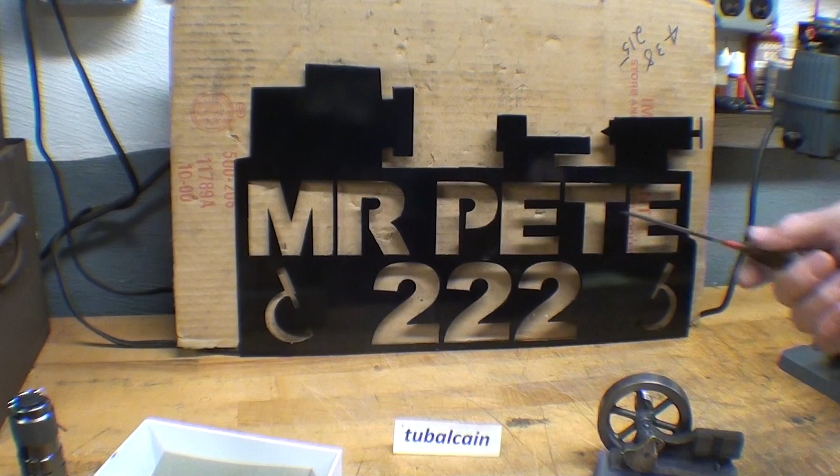Here's what Aidan made for me, this nice cutout saying Mr. Pete 222 with a couple micrometers on it. Look at the lathe up here, there's the chuck and the compound and the tailstock. Thank you, Aidan, that's pretty cool. You'll see that here in my shop from time to time.

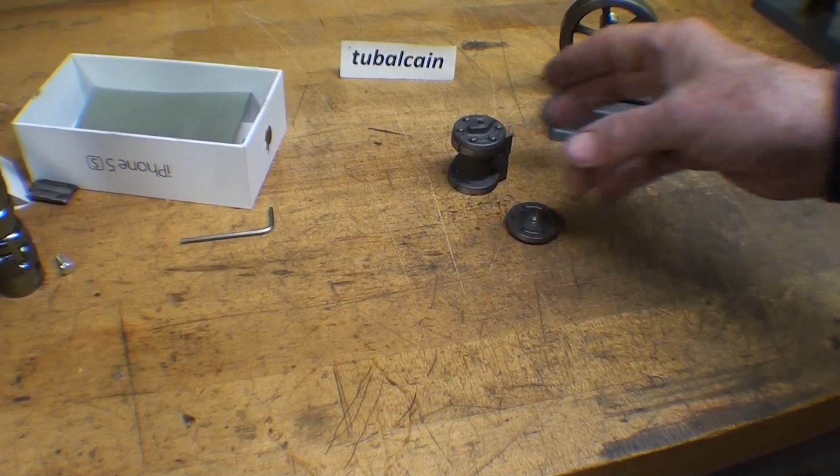Now, in the last episode, I was drilling and then tapping these 6 holes here. So take your time when you do that so you don't break off a tap. I sighed a little bit of relief when I finished that and did not break off a tap.

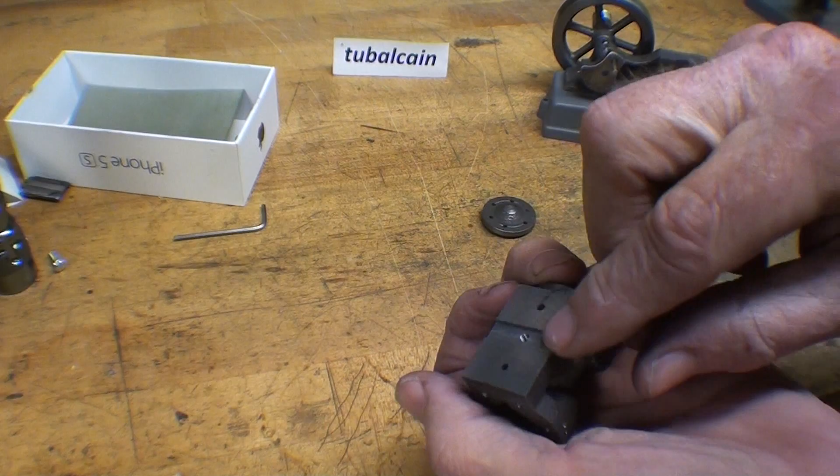So this being pretty much done, the next thing I want to do is start making some of the bar stock parts, particularly the little pivot shaft, which is pretty simple, but I'll make that in a minute. First I want to take the two heads and provide the clearance I talked about earlier so that this little step does not block the steam port.

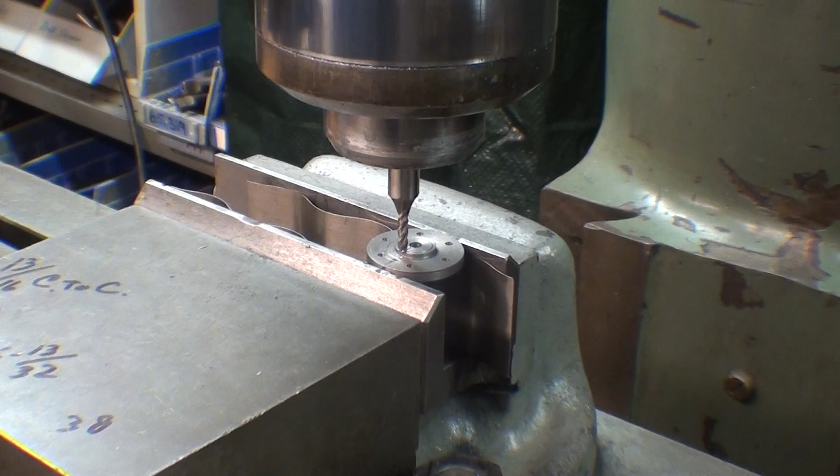I'm at the mill and I'm making the little clearance slot on the backside of the head for the steam to get in there, in other words, for the steam port. That's an 1/8 inch end mill.

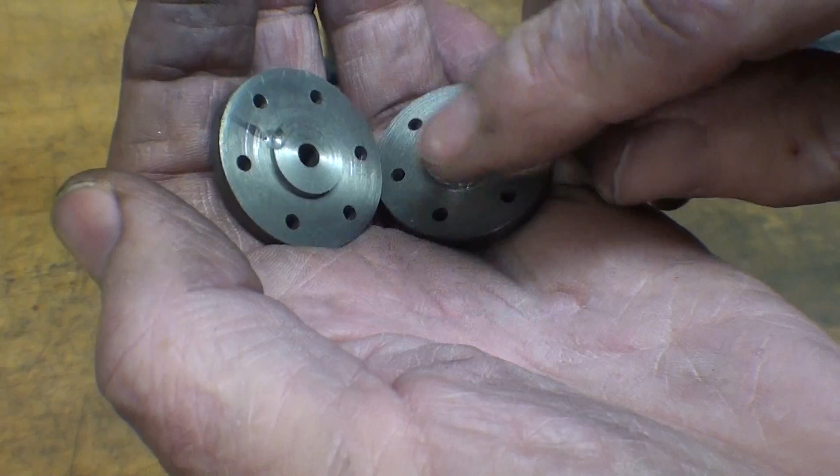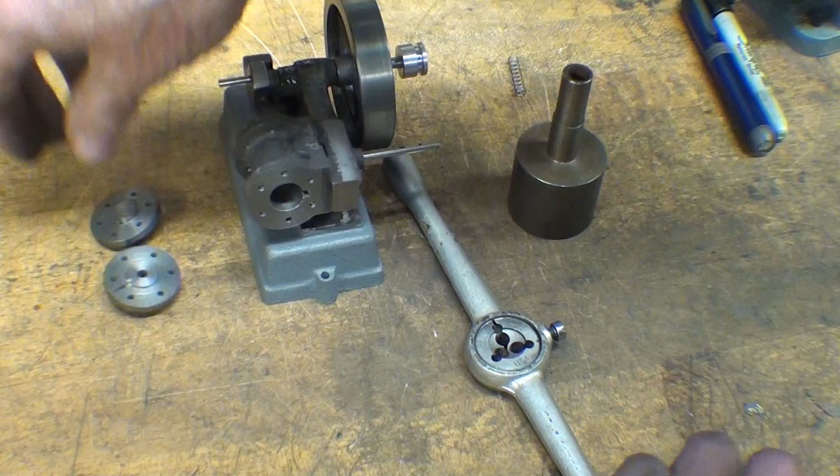That's all there is to that, maybe a little bit deeper yet. Here's the little clearance slots that I made on the heads. Originally I was going to put them in at an angle, but I don't think there's any need, and this was easier.

I've been working on this project for 9 or 10 days, and I'd say I have about 25 hours in it or more. I didn't work every day, and I didn't work 8-hour days. However, it probably takes about twice as long to do this while I'm videotaping than if I was just working alone, so to speak.

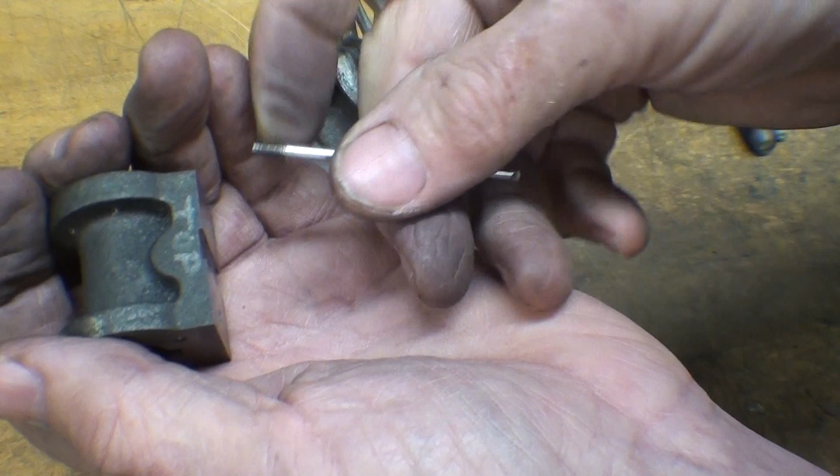I'm not working alone, there's thousands watching. Well, the next thing I'm going to do is make this pivot pin, and I've already taken the liberty of taking this 1/8 inch rod that was included and putting it on the lathe and putting about 5/16 of 5-40 thread. Now 5-40 thread again is 1/8 inch. Eventually I'll Loctite that in because you don't want that to spin loose as the engine is running.

But it goes into the hole here, and this is the point at which you'll determine whether or not you drilled this hole square and tapped the hole in the cylinder good and square. Will it be a good fit? So looking at the spring that came with the kit, I'll put that on there, and there's a nut, I believe there's a nut.

So I'll cut it off at the outer black line, throw that little piece away, and then I'm going to thread it 5-40 up to the other black line.

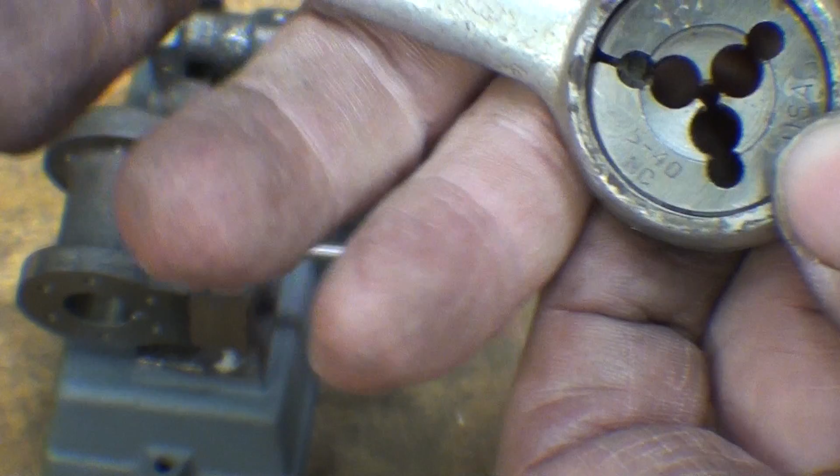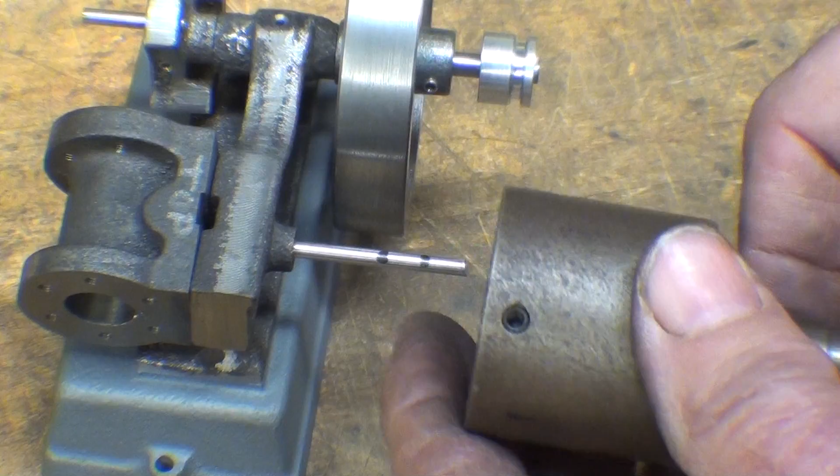Now, do not even think about using this type of die holder for making those threads, and this is a 4-40. But I have another one right here in this die holder, and I like to cut these threads on the lathe, it assures you a straight thread. If you use this other one, you'll be pouting all the way to the bank.

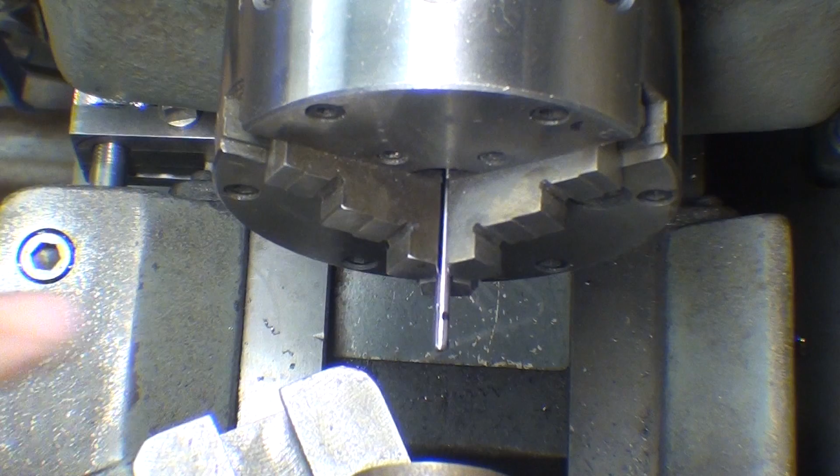You've seen me do this countless times. Be sure and use oil and chamfer the end of your work. I'm in back gear, slow speed, and I'm going to watch that line. You have to really shove to get that die started, so I'm shoving on the tailstock.

That's all there is to that. Now, since this lathe does not have a reverse, I take it out of back gear and just spin it off. Now it's better to have a little extra thread here because I'm not really sure how tight I need to make that spring in order for it to run. Back to the bench.

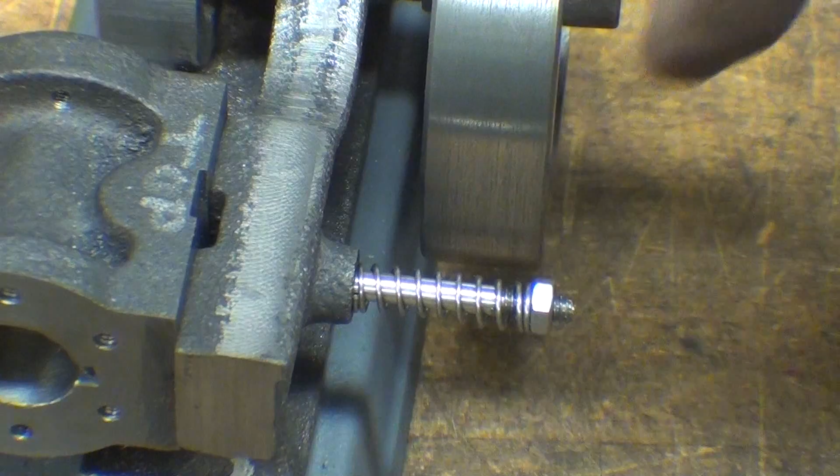Now temporarily assembled, and this rod may be way too long and I probably should have put a little more thread on it, but I just don't know how much I'll have to take this up. There'll need to be a washer in there, and in fact they supplied 2 nuts, and I think I want to use one as a lock nut, in other words double nut it.

But let me show you something here, these are 4-40 nuts, but I'm wondering if they're 1/8 inch Whitworth. I'm not sure what 1/8 inch Whitworth is, but they are not BA. But they're pretty little nuts, and you say, well, what's pretty about them?

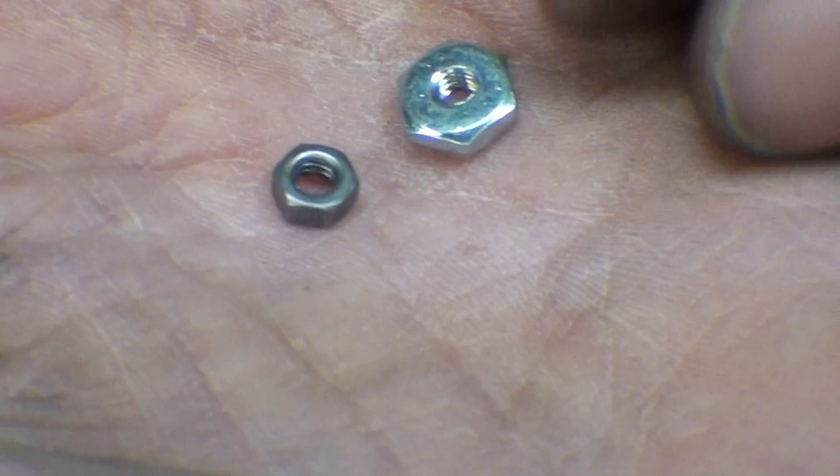Compared to a modern day plated 4-40 nut that to me looks so out of place and out of proportion, if that's what you would use. You see what I mean here, if I can get that on. There, you see what I mean? That isn't pretty. In some ways, that is pretty. You can make your own with small hex stock also.

Now I will move on, and I'm going to start the piston rod, and then I'll have to make the piston also.

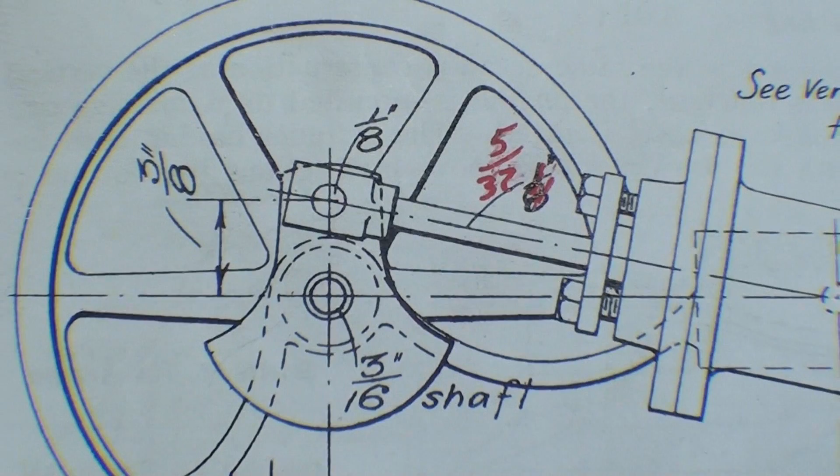Next I'm going to make the connecting rod end, and it's going to be made of 1/4 inch square brass, which was supplied. Now I changed the dimension of the piston rod from 1/8 to 5/32, but we'll have an 1/8 inch hole in there and an 8-32 thread on the end of it, and turn down just a little bit.

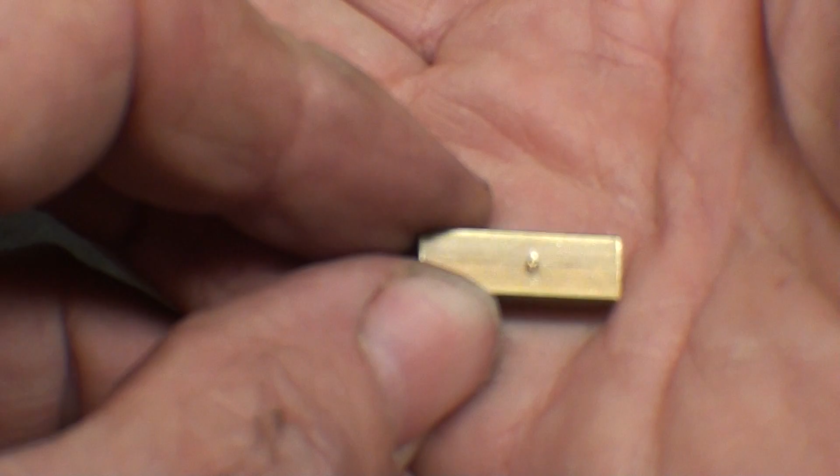And I intend to do that, and here's the piece already laid out with the cross hole, which will be drilled and reamed 1/8 inch. But I tell you what, I'm just going to drill it 1/8 inch because I want a little clearance. Sometimes the reamed size is a little bit too tight, although I don't want it to be sloppy.

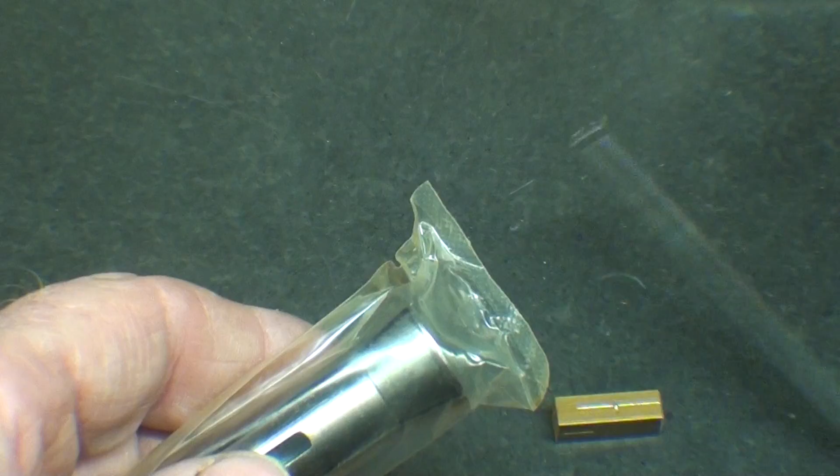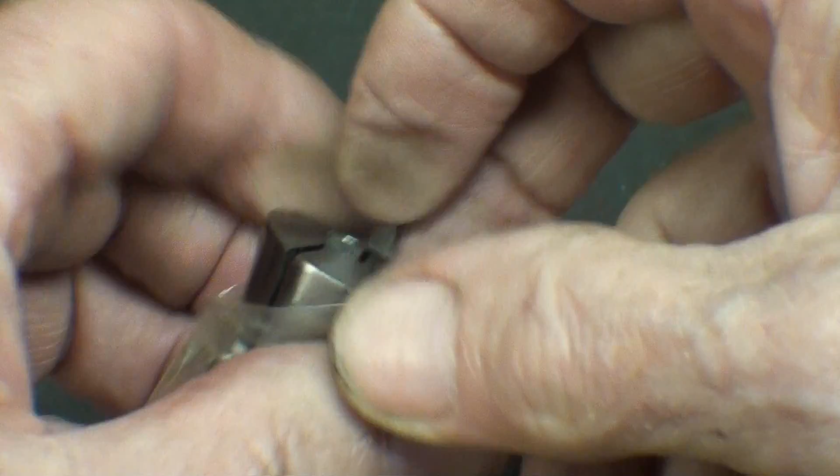And then I'm going to do this in a square collet. You know what, here's one I've had for a couple years. Never used it, never opened it, but let's break it out. This will be used on the Atlas lathe. This is a 3C collet, square collets. They make the job so much easier than a 4-jaw chuck.

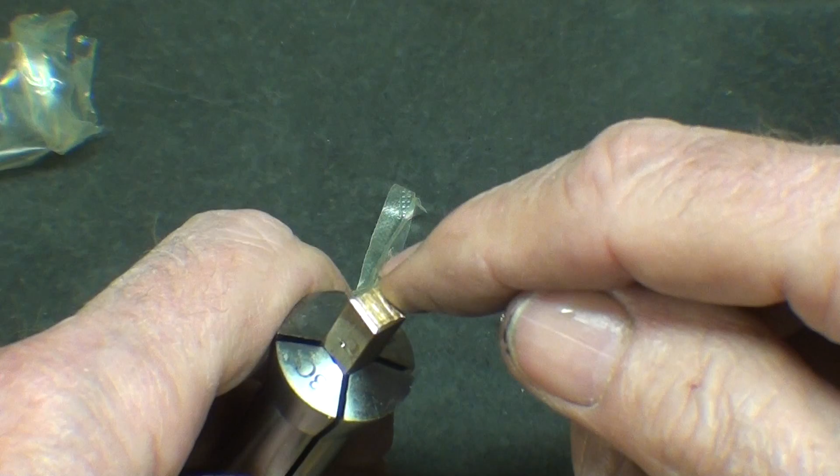So it'll go in there like that, but I think I'll drill, I've got some burrs on there. And it's so easy to drill that end hole and then tap it. I'll drill the cross hole right now off camera.

I've already drilled the cross hole, as just mentioned, and now I'm ready to center drill and then drill and tap the end. But you know, I wasted 20 minutes cleaning up the horrible thread that was on the end of that collet that I showed you a few minutes ago. So any time that I might have saved by not using a 4-jaw chuck was wasted. So anyway, maybe it'll work the next time I use it.

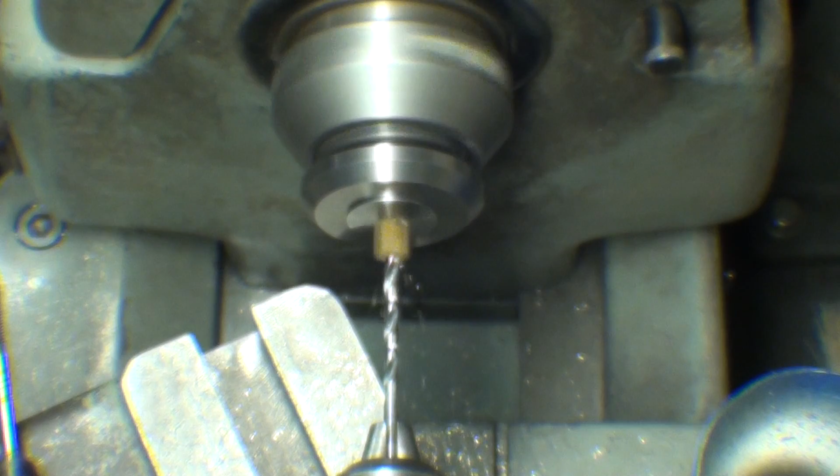And tapping it 8-32, including a bottoming tap. And now I'm turning down just a short section of it to remove the square corners.

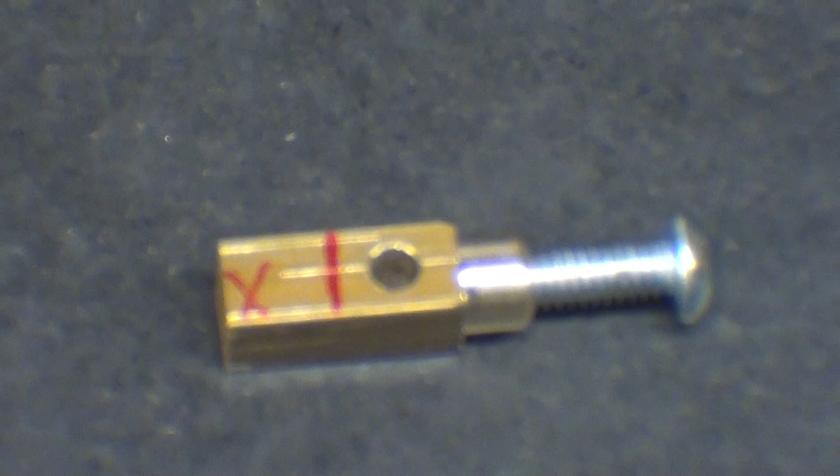Well, there it is. I still need to saw it off on the red line and then face it, and you can see that the part with the X on it really is waste stock, but there were no real dimensions for this on the drawing, and that's true with a lot of these little parts. It just leaves a lot up to your imagination and creativity, so I don't really consider it a set of working drawings, but there's basically the end.

Now it looks complicated, but there's just a lot of little operations on there, but the whole thing, if you don't have to repair a thread on your collet, only takes about 7 minutes.

Next I will tackle the piston rod made of 5/32 brass, and I'll just thread the end 8-32. I don't know what the length is, so I need to make the piston one step at a time here. But looking at it now as I start to assemble it, remember I talked earlier about not knowing where to cut this off or how long it should be.

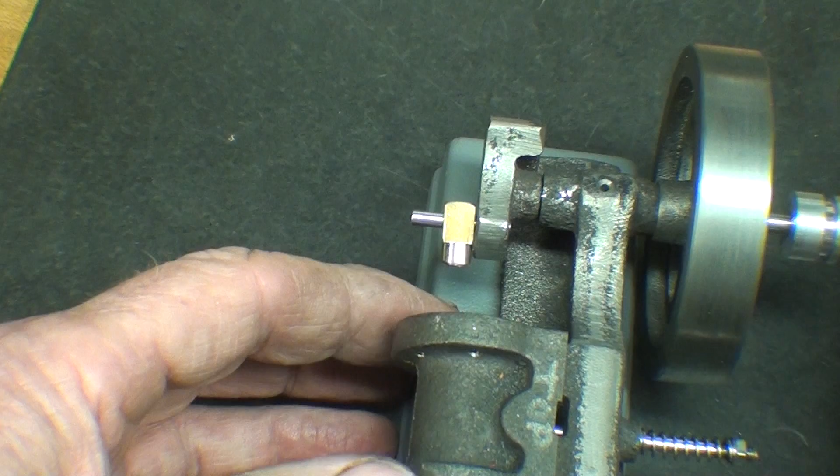Now it's becoming evident that I lay something in here. Well, what should I lay in there? This, perhaps, just an Allen wrench. You can see that I am off by approximately 1/4 of an inch, so I will have to remove material from those two spots to move everything over.

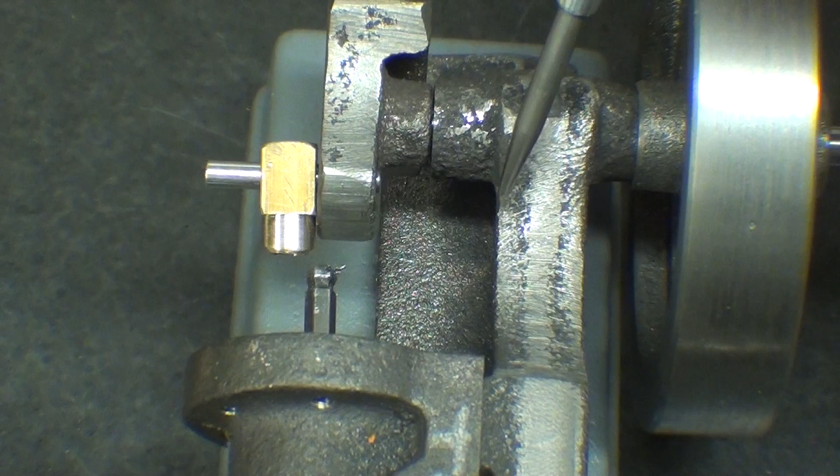And that's going to be bit by bit, but I think I'll wait until I get the piston made to do that.

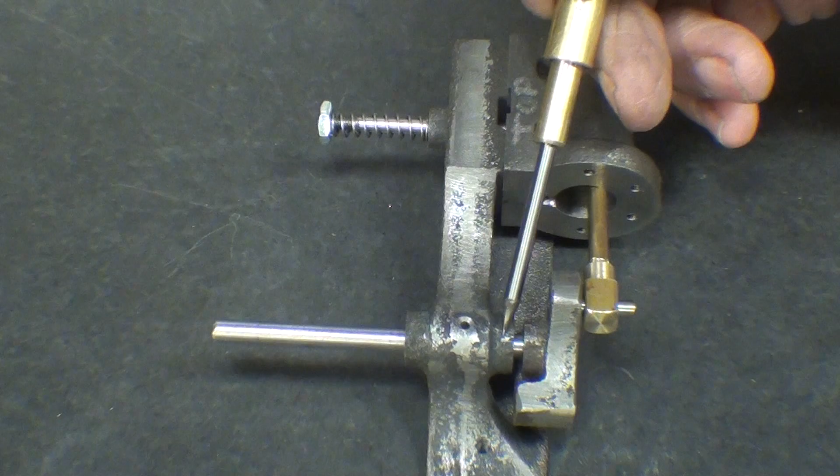In the last few minutes I trimmed some off of this main casting, so you'll see that's a little bit shorter. Also this is a little bit shorter, and then I needed even more material removed, so I faced a little bit off the face of the crank. Now I am able to get the center of the piston rod in the center of the cylinder, and still have just a little bit of space in here. So there's an awful lot of fitting involved when you're not working to exact dimensions on the parts, and that's all right when you just have a one-off.

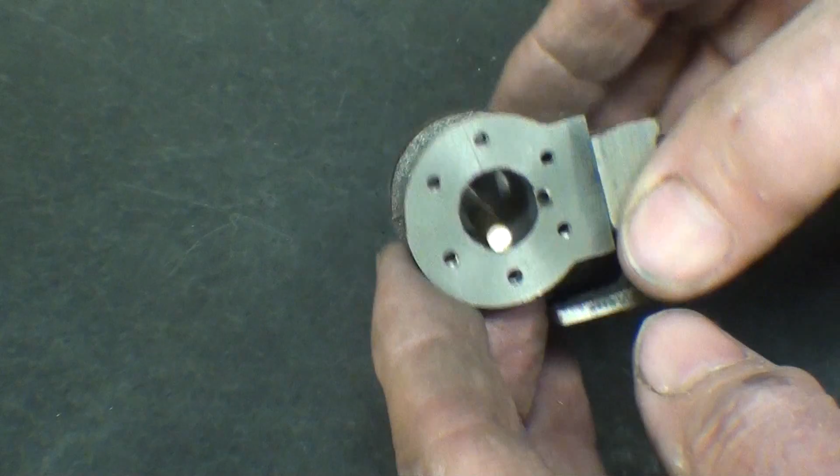Now the next thing I'm going to do is tackle the piston, which hasn't been made yet, as you can see, and I'm considering different materials. I was considering brass, and I was considering Delrin. Cast iron would be ideal too, but I don't think I want it to be steel.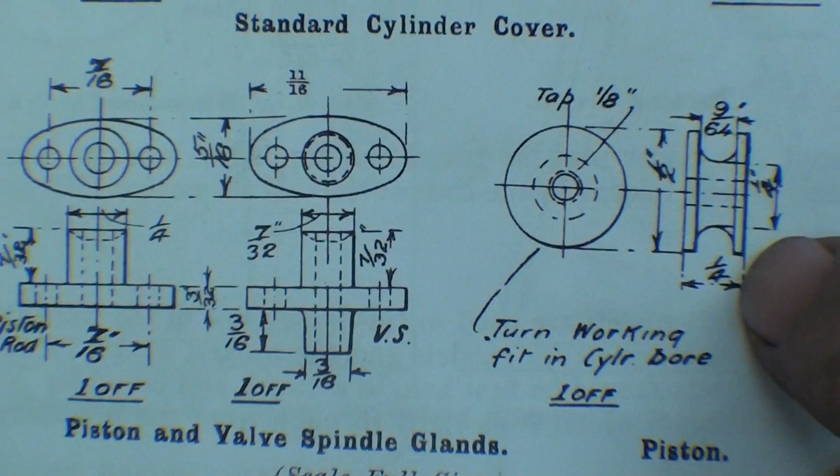If I look at the drawing, there's very little information given, other than that's the piston right there. And the groove there, I believe, is for a packing - that is, graphite packing. I'm not going to do that, I don't think it's necessary. So all I need is a piece of brass that's 1/4 inch long, so it's a really small piston.

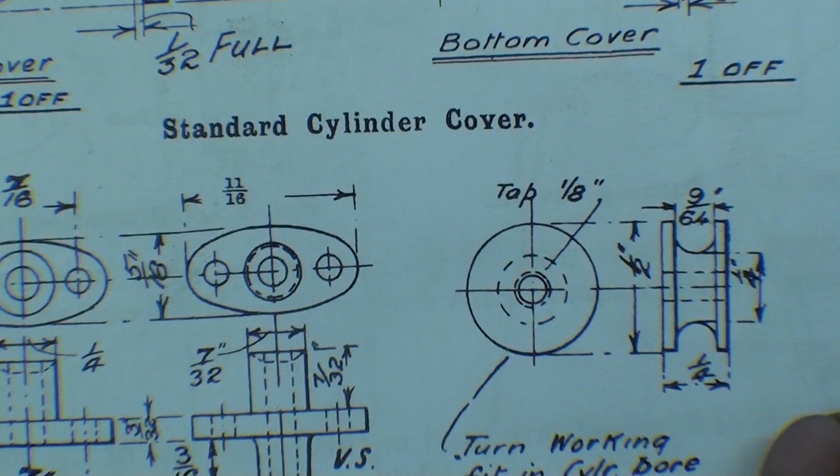And then that hole drilled and tapped in the center. And then if there's any material left, I would like to turn it on the pin here, the shaft, so that it's truly concentric, so I don't have any binding when I put it together. And this brass is just a little bit oversized. So let me get started on that.

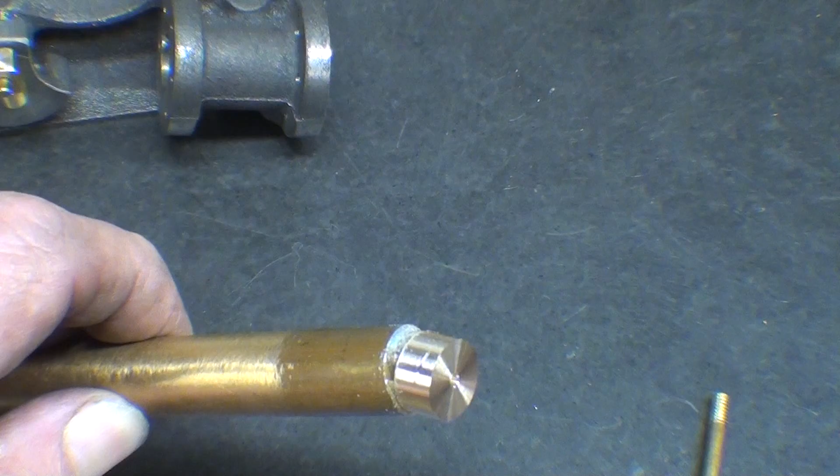You know what, I changed my mind again. Instead of using 1/2 inch stock, I'm using 9/16 stock. I've turned it down to within 10 thousandths of 500 - it's 510, I should have said. And I center drilled it and sawed it off. Now what I'm going to do is put it back in the lathe.

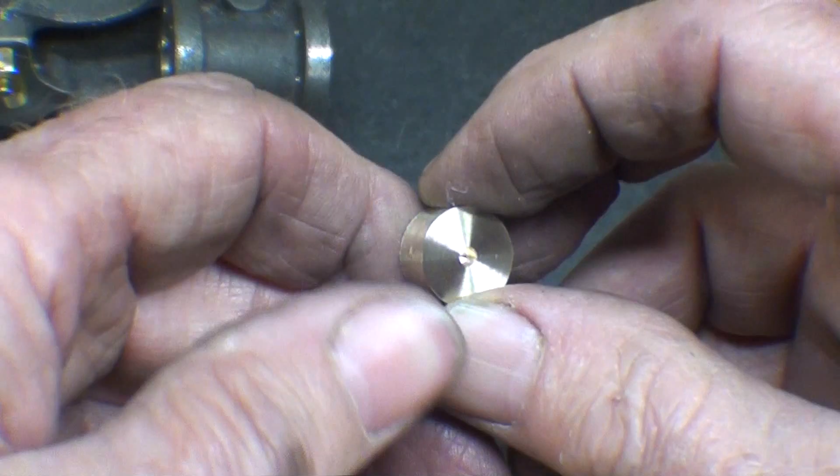It's a little bit longer than 1/4 inch long. I'll drill it and then tap it to 8/32, and then I'm going to mount it on this piston rod. And again, as I said before, turn it down to 499 thousandths, and I'll probably put a little oil groove right in the middle, if I don't change my mind again within the next 3 minutes.

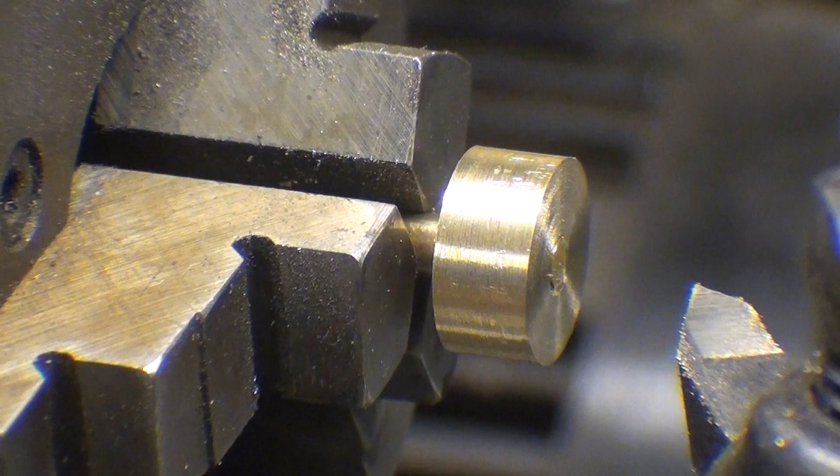The piston is mounted on that rod permanently, and I faced it off to 1/4 inch thick. Now I'm going to take it down, as I said before, to 0.499 thousandths, and then chamfer both corners. I'm doing this in an extremely accurate chuck, otherwise you're assured of it being eccentric, and I want it to be concentric with the piston rod.

A collet is even better, but I did not have a 5/32 collet, so I had to settle for this little chuck, which is quite accurate. And then I'll polish it up a little bit and make sure that it fits into the cylinder before I take it out of the chuck.

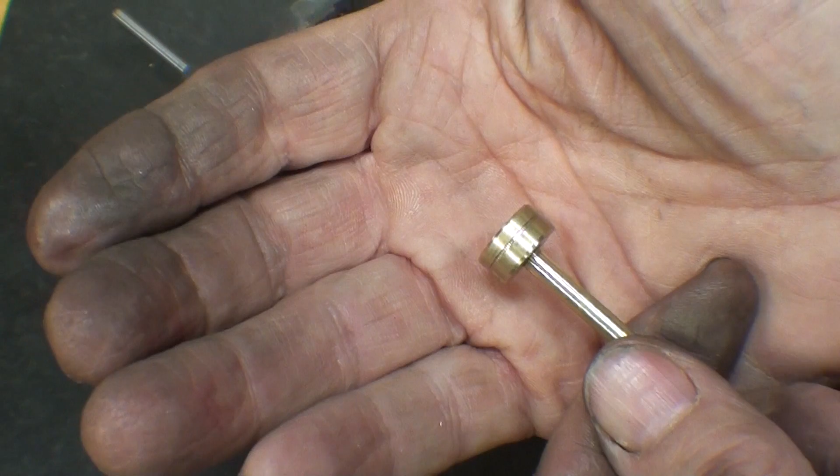This is all taking quite a bit longer than what you might think, although I'm compressing it greatly in the video. I got a little bit of a crude ring there in the middle, and I got a real good fit within a half thousandth.

I had to polish the shaft just a little bit because this shaft was oversized for a 5/32 reamed hole, and I've already got it together here. Make sure that you oil things as you assemble them, just a drop of oil. Oh, that was more than a drop. But it moves in and out freely, turns freely, no binding here or apparently in here.

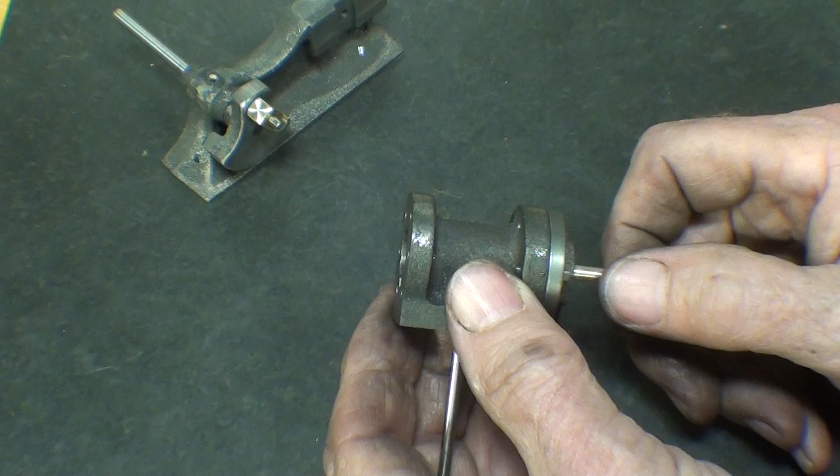It should not be tight. You shouldn't be saying to yourself, oh well, I'll just run it in with 110 pounds of air and put some lapping compound on there. No, you need to have a good fit now, or remake the parts, as discouraging as it may seem.

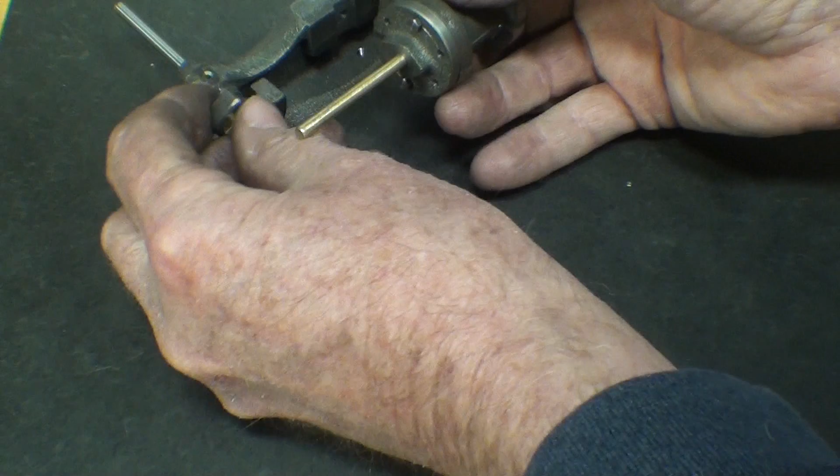The next step is that this shaft is way too long. I have to determine the length and then thread it. I'll do that all off camera, I don't think that's very interesting, but that's a matter of fussing over it, and this is way too long.

You can do some measuring or just cut it and then remeasure. Do that several times, and then the final take-up can be just a little bit in the thread, and then Loctite it.

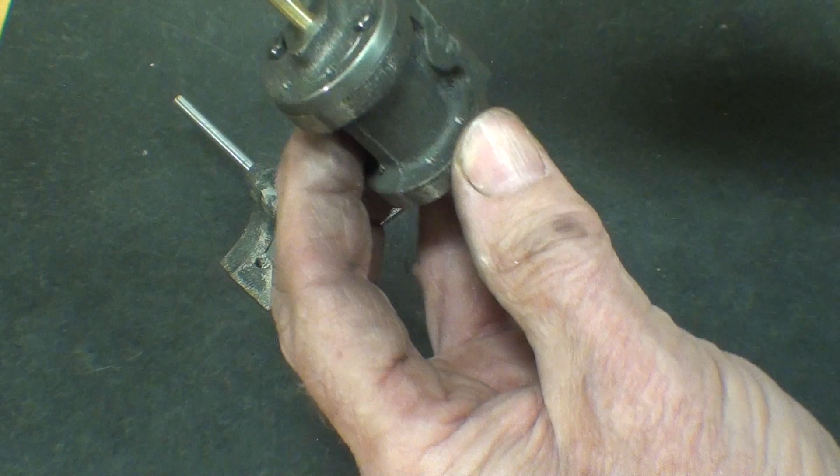One thing I may not have mentioned before, did you notice that I drilled and tapped the holes where possible all the way through to avoid blind holes? As unsightly as that might seem, remember there'll be a lagging over there when I'm done. I may have said that before. When I do something like this over 10 days, I forget what I might have said in the earlier ones without rewatching my own videos.

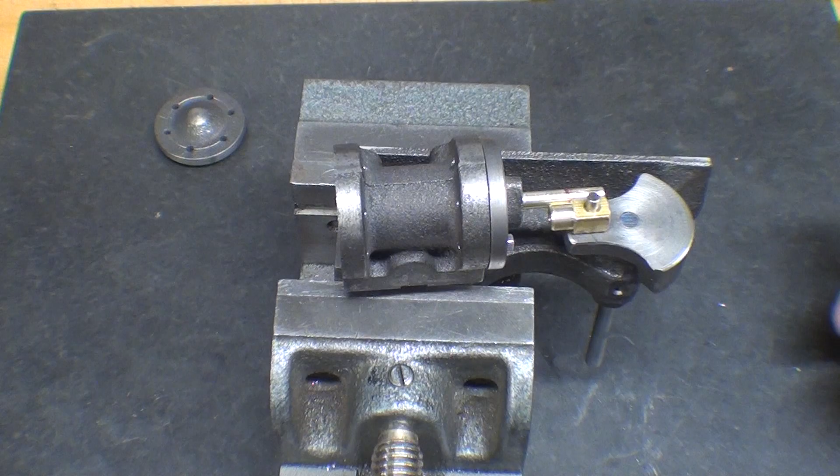Something just dawned on me as I was drinking a cup of coffee and taking a little break. I cannot gloss over this particular step here, because this is one that was hard learned by me, and I wish I would have had someone explain it to me. It might be obvious to some of you, but what I'm talking about here is the length of the connecting rod, or the piston rod.

So let me show you how I'm going to do that, although this is a bit fussy, but there's some method to my madness. Take a look now that I have the piston brought forward almost to the hole, and remember that there's still a bit of a step on here.

So what I've done here is mark the rod where I intend to cut it off, then put about a quarter inch or less of thread on there, because the thread in this piece goes up to about the end of where the cylindrical part is. So I've got that marked red, and it took me a couple tries to get that marked where I want it. Now watch what I do.

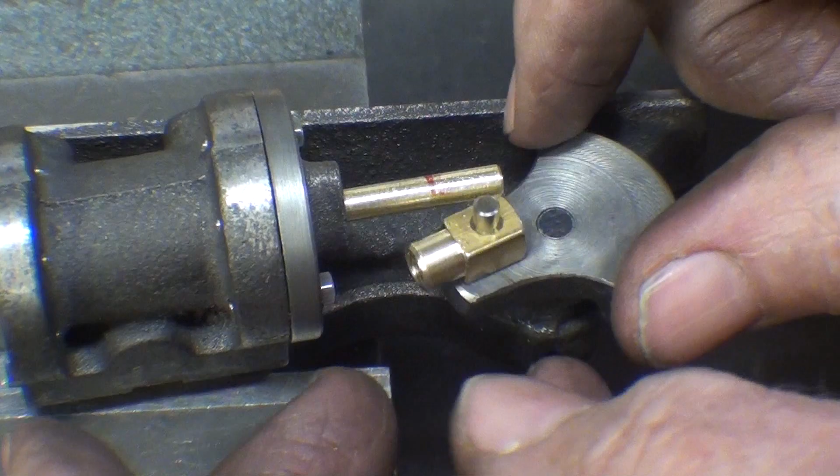I'm going to push the piston all the way back until it's touching the back plate here. I've got to rotate that just a little bit so you can see the line. Then bringing the crank all the way around like this, and then pushing it forward just a little bit so it's not actually touching the end of the plate there.

You can see, so I think now I could measure with a depth micrometer in there, or depth gauge, but you can see that the red line coincides all about in the exact same spot. So now I feel safe to saw off and throw away this little end here, and then put a thread right in here. Does that make sense to you?

So that's my game plan, but I can't really show that to you. Well, I could, but that's pretty mediocre stuff to show you. I think the important part here was to show you how I determined the length of that rod. What do you think of that?

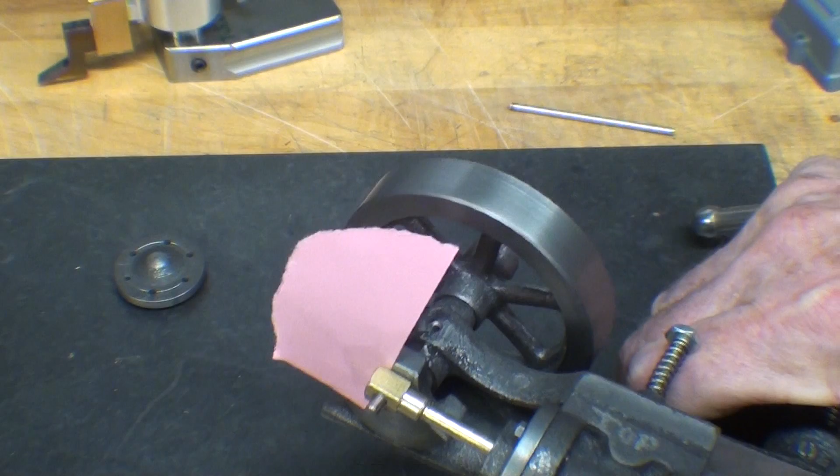I still have a little interference where the pink paper is, so I'll take this crank off later and machine a little more off of that. It's got a terrible finish on it anyway. Sometimes I don't realize how bad a finish is until I get it on the large screen and magnify it, because I can't see that with my bare eyes. That's of no consequence, but I'll do that off camera.

You can see that was a tight fit, so it's rubbing there, but it'll still turn fine, and there's no other binding whatsoever. Just as smooth as a hound's tooth.

A couple other things I'll do while I'm at it, and that is to put a flat on the shaft for this little grub screw, and do some other final fitting.

I must be getting fairly close to the end, because I'm starting to think about paint, and you know how much I don't like to paint. But I am going to paint this, it'll be a rather superficial job. Then, remember I have gaskets to make.

But probably the single hardest thing to do is coming up, and that is to locate and then drill the two steam passages. Because again, there's 4 holes to drill there. We got some holes that are right angled to each other and that have to have perfect alignment. So I'll talk about that a little bit later, how I'm going to do that, and there is more than one way to do that.

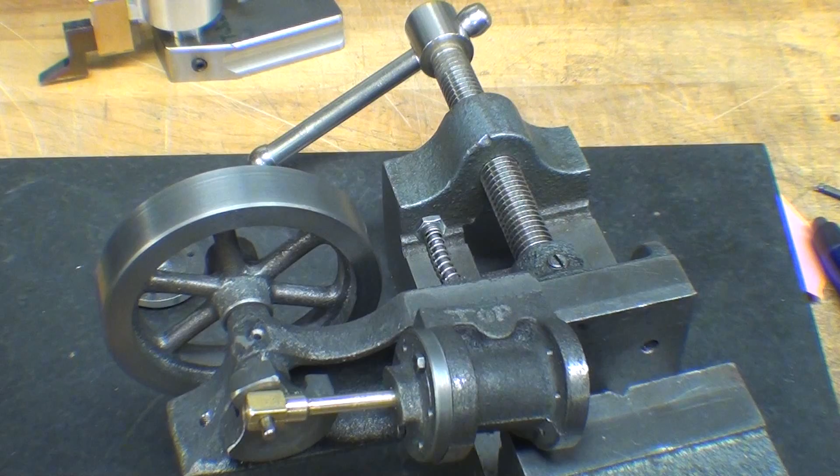I've strayed quite a bit from the drawings because I don't think too much of this set of drawings. Another thing that I haven't done and may not do, I've talked about that before - I'm not going to do it, I've just made the decision. And that is the packing box that goes right here. I just don't see the need for it. As long as I got a real good fit and don't have much air or steam escaping here, there's no need for that, I don't believe, on a small scale engine like this.

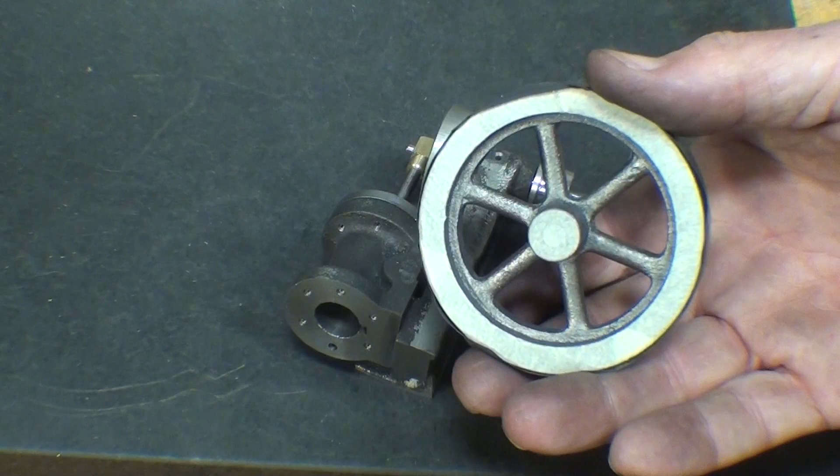So, up to this point, I'm quite satisfied. The flywheel is masked and ready to prime and then paint. That'll be painted green, I hope the color looks okay. And I have to get a can of spray paint, and I'm going to paint the base black.

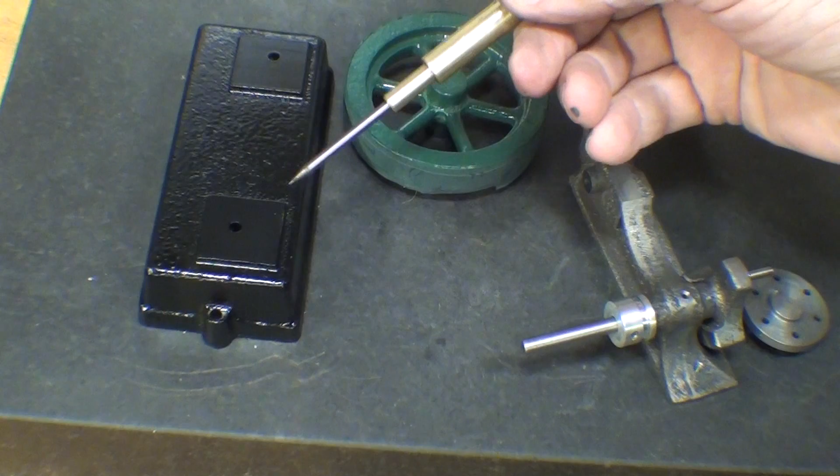I'm making progress finally. I've got the base painted black, that's semi-gloss black, and semi-gloss green here, and everything else will be that color of green.

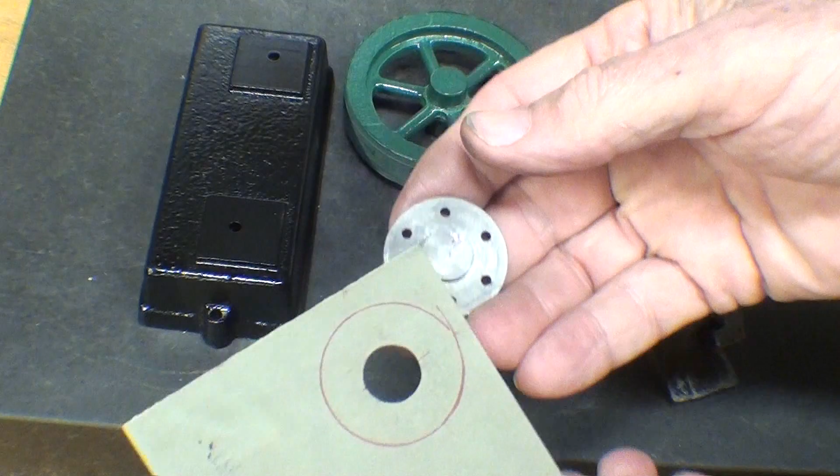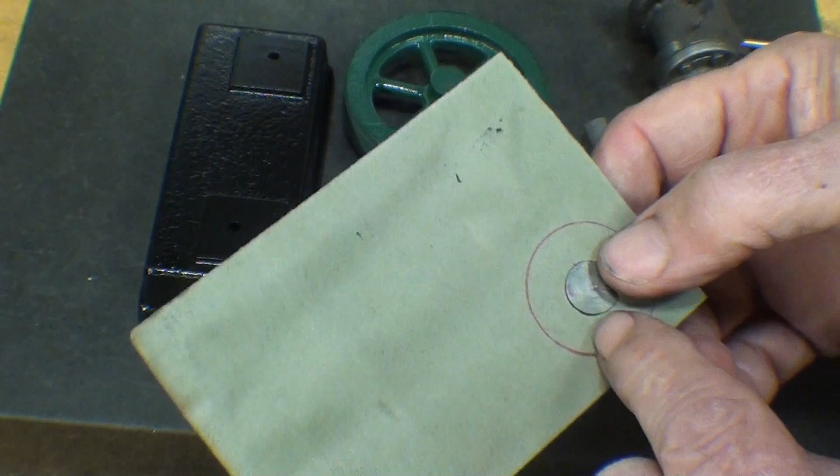So next thing I'm going to do, and I'll do most of this off camera, is to make my gaskets. I already punched a hole in the middle, and then you know how to make gaskets just by tapping. I think maybe those tiny holes will be a little bit of a challenge - I think they'll probably need to be punched rather than tapped. So I'll make those 2 gaskets, and then in the next video start talking about the little steam ports that I have to lay out and then drill.